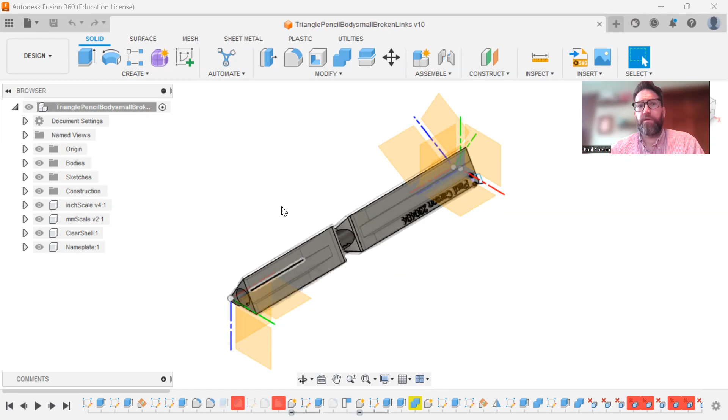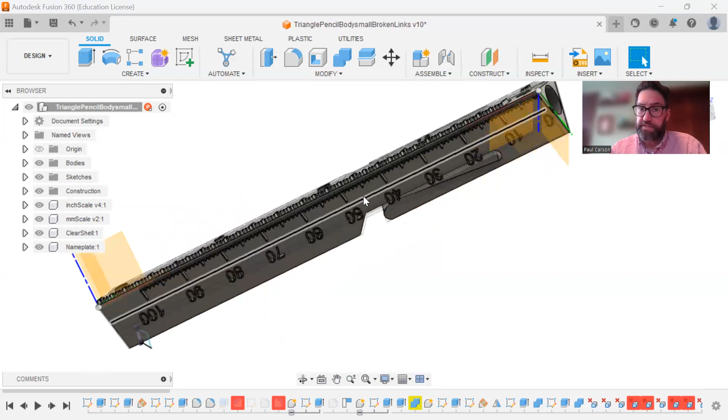And so I like to carry a clipboard and a mechanical pencil, and I often also want a machinist scale. I always liked the look and feel of an architect scale that has a bunch of different scales on a thing with a triangle cross section. So I made this mechanical pencil body that has scales on it. You can see here, and I will post a link to this CAD file. You're welcome to copy it and change it and do whatever you want with it. If you can open the original file, please don't change my original file. Thanks.

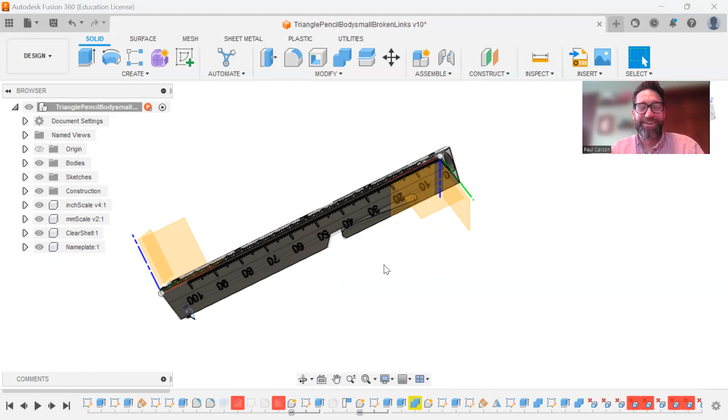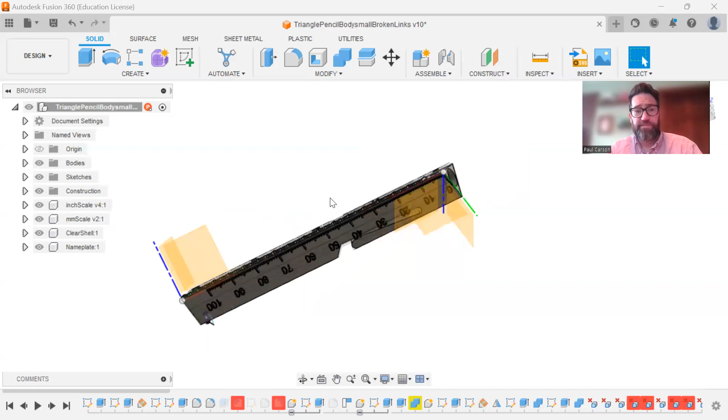Otherwise, it's a pretty good example. This is complicated because I've been iterating on it for a while. I use it to keep the printer running. It is an inkjet printer, and it works a lot better if you run it all the time. So I print a bunch of these and I use them as sort of work party favors. Anyway, so we have this pencil body. It's a tube, it has a clip, it has an inch scale, it has a millimeter scale. They go from opposite sides.

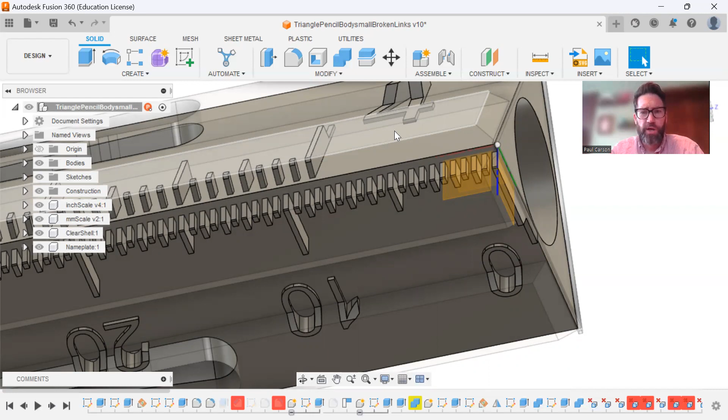The scales are actually bodies in there. You can see them, and there's a transparent body around this. If you open the file, you can check it out, and that's why these shapes look weird. It is because this printer will print in a transparent ink, and you can make a transparent shell around your part. It's super cool. It's more transparent in some orientations than others. You can also wet sand it with super fine sandpaper and get it to be kind of optically clear. There are details around that with UV curing that I read the instructions and then promptly forgot all about. They exist. You can check them out on the Stratasys guides.

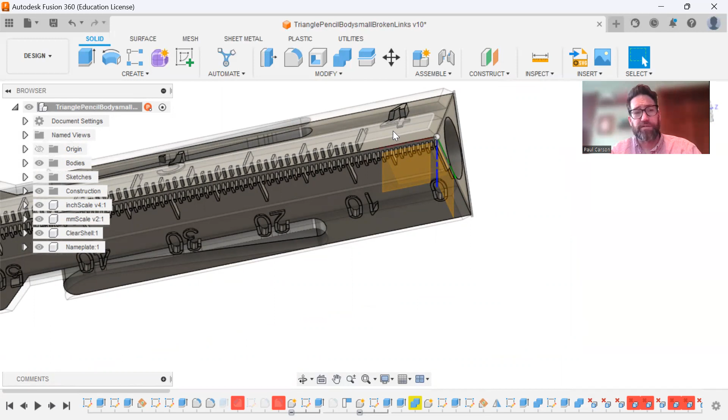Anyway, so this has a body for the pencil. It has bodies for the scales, and then it has bodies for the clear shell. Anyway, that all exists. You're welcome to go through and critique my CAD model and whatever you'd like to do with this, except edit the original. Thank you.

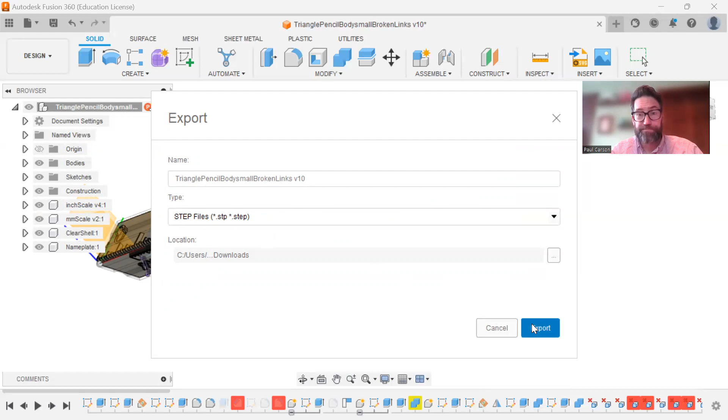And we are going to export this file. So file, export. And we're going to change the type to a STEP file. Not an STL, a STEP file. And this is an exchange format for CAD files. So I'm going to export that. It's going to go into my downloads. And turns out that I've already exported this version, and that's okay. I'm just going to replace it. Cool. So it's exported. It's done.

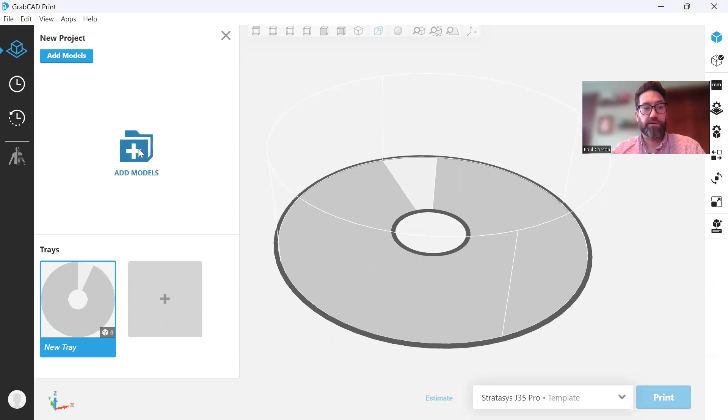Now we're going to move to GrabCAD Print. So I'll open that up. Here we are. We're in GrabCAD Print. And this controls the printer, or makes the files that control the printer. And I'm going to add models to it. So I'll import my models here. You can click this button up here. And here we go. Triangle pencil, a bunch of stuff, V10. It opens it up. It takes a minute because there are a ton of tiny little bodies in this thing. So here we go. We're gonna wait.

I suppose this is when I regale you with a funny personal story. I'm not sure that I have one. All right, it's loading. We're getting there. At this point, you decide that you probably want to watch this video in 2x. I wouldn't blame you. All right, here we go. Takes a while. Bunch of little bits. This is starting to be a lot like college radio. Followed by dead air. And that's the best I can do for a joke today.

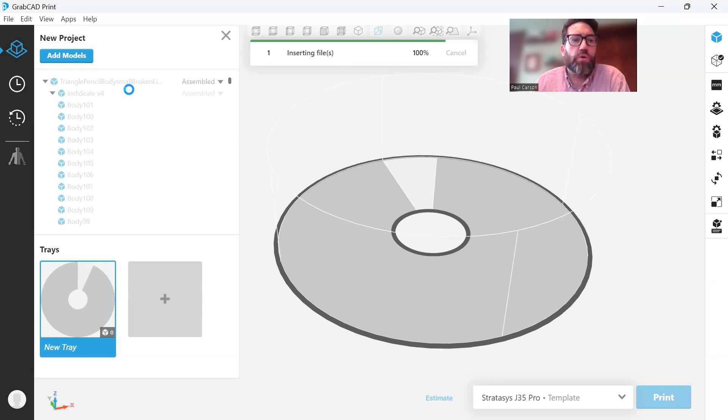So this is all going to open up, and probably because there are a bunch of teeny tiny pieces that all touch each other, there will be self-intersections or some problems with the model, but we're going to get there in a minute. So, here we go. Cool, we got tons of bodies.

Over here on the left, that's showing all of them, at 100%. This area on the right is the preview for the build platform on the printer. It's a ring, so this thing is a turntable, and it has inkjets and an ultraviolet lamp that cures the ink as it prints layer by layer.

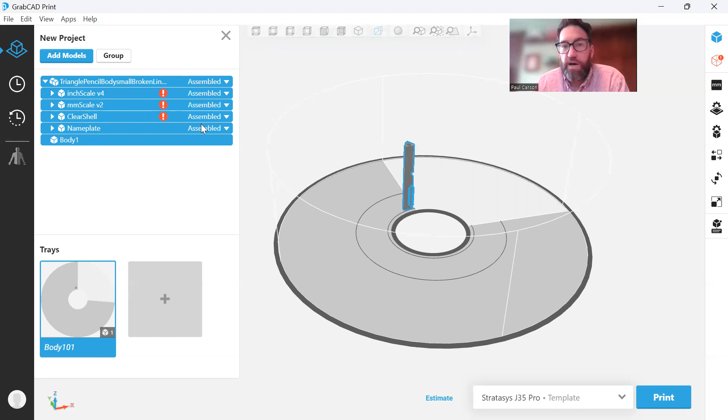So now we have a list of all of our bodies and all of this stuff over here on the left, and a preview here on the right. And if you look at it and highlight it, you can kind of see the outlines of a bunch of this stuff, but it's all the same color.

So I happen to know I want the main body to be white. This thing prints in black, white, and clear ink and a support material. We can get other inks, but we don't have them set up at this time. There's a thermoplastic elastomer, it's grippy, it's rubbery, which could be nice for this application because you grip it. Anyway, it's loaded, so I'll stop digressing.

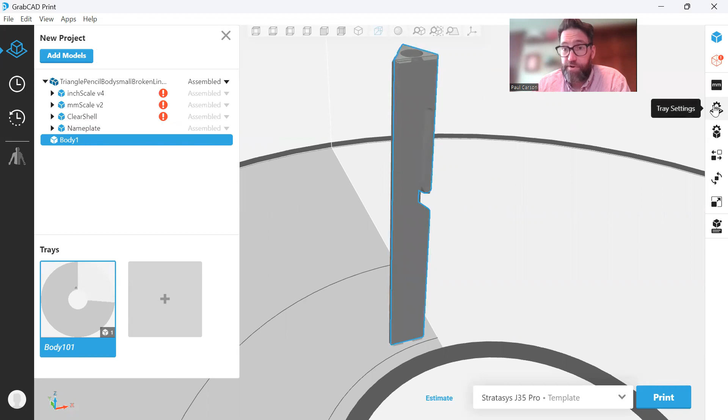So I'm going to load this, highlight this body, and set the model parameters for it. I can change the tray settings, I can change the model info. Before I do that, I need to deal with these errors. It throws up these errors, and you can fix them over here. Five model errors detected, so I'm going to click on this.

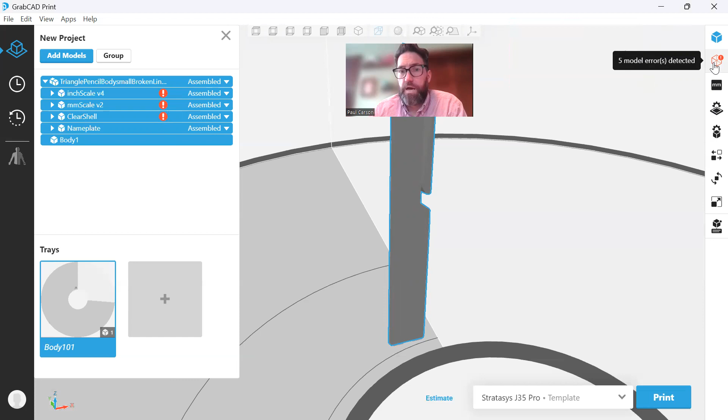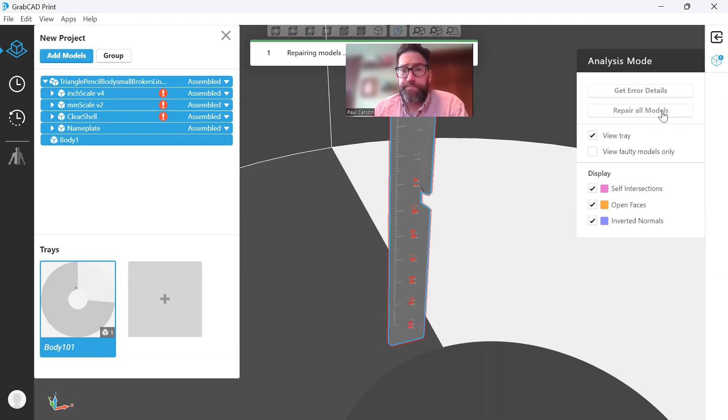So probably intersections, where it shows two pieces in the same place. If you hit repair all models, it just fixes it. Great, so it has repaired them all. Now I'm going to leave this mode, go back. Yep, cool, and it doesn't show any errors, so it's trimmed everything so it doesn't intersect itself. Great.

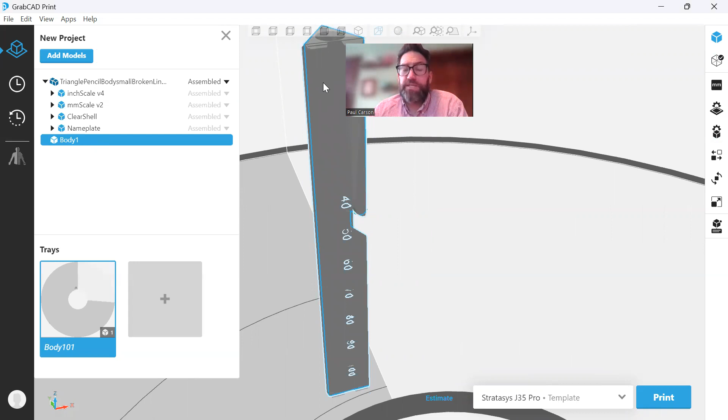Moving right along, I want to change the color of this body. So these will print in black and white. They'll also print in grayscale, so I could make it some percentage grayscale, but I want this to be white.

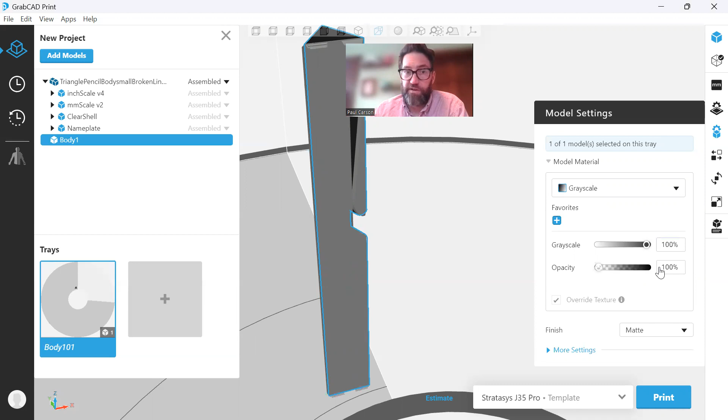So here on this ribbon on the right lets you set up your print and change the things. I'm going to change the model settings for our body. I could change the grayscale, make it 100%, a little slow. I could also change how opaque it is. I could make it all clear, and then it would print in clear ink, but I don't want that. So I want this to be 100% opaque.

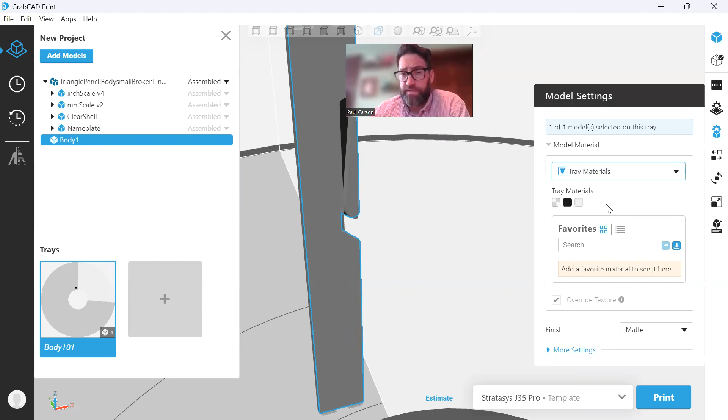I could change these for the different bodies if I wanted. When I designed this, I designed it to use the tray materials. I also, because I use this as a maintenance print for the printer, want to make sure it uses all the materials. So I'm going to highlight this body and pick the tray materials.

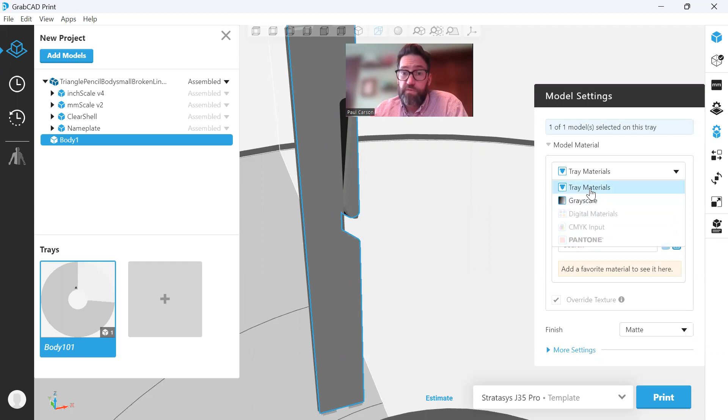So here in the model material, I can choose grayscale or the tray materials. If this were a different model printer, I could choose digital materials or different colors, but this one only prints in black and white. So I'm going to pick tray materials and choose white, Vero Ultra White. It's cool that it gives you the mechanical properties as well. So I'm going to make that white.

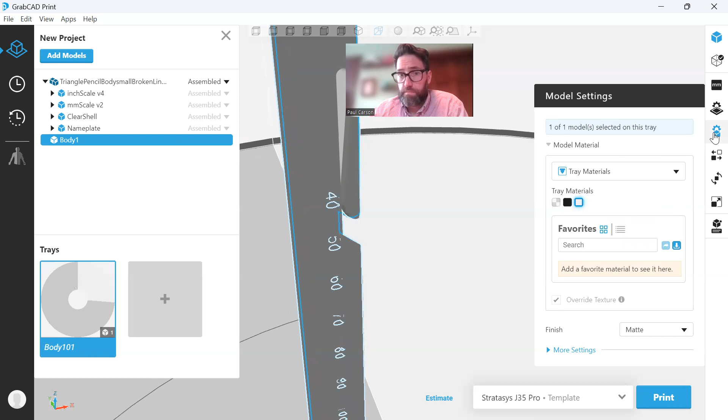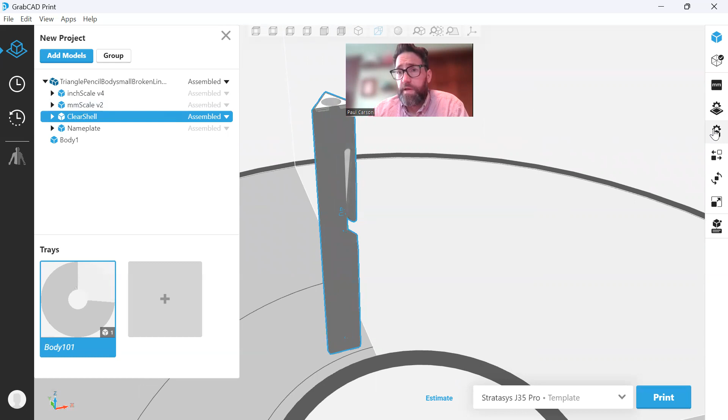And it's not showing up. You can actually only see it on the end because the clear shell on the outside is showing up as the default, which is like 40% grayscale or something. So I'm going to highlight the clear shell and change it. I don't want it to be grayscale, I want to use the tray materials, and I'll use Ultra Clear S because it's clear. Click it. It's taking a minute to update, but there, now it updates to clear.

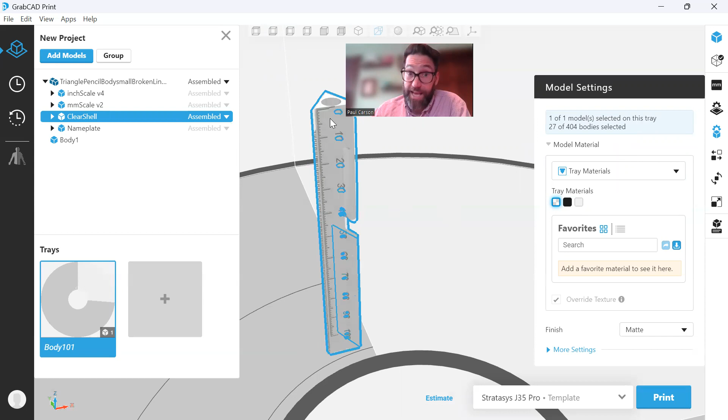And now I have these grayscale scales on my white body with a clear shell. Great. And then I've labeled the different scales and put my name on it because I'm proud of it.

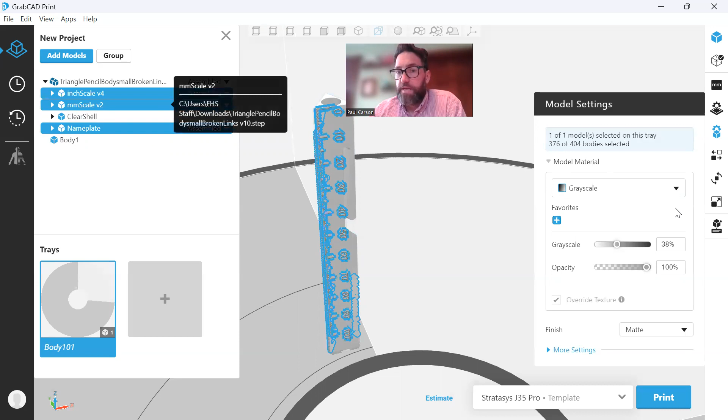The nameplate, if you control-click these, you can select them. These have a ton of bodies because each of these little lines is a body, so I'm not going to expand them. I'm going to make them black because the body is white and I want a lot of contrast.

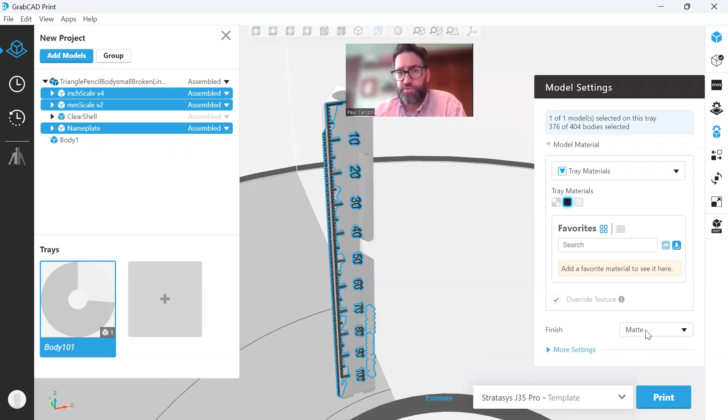Great, cool, they're black. I could change the finish. Looking through the instructions, matte finish will give slightly more dimensional accuracy. I've printed a number of these in glossy, and honestly, I couldn't tell the difference, so I tend to leave this at matte. There are more settings.

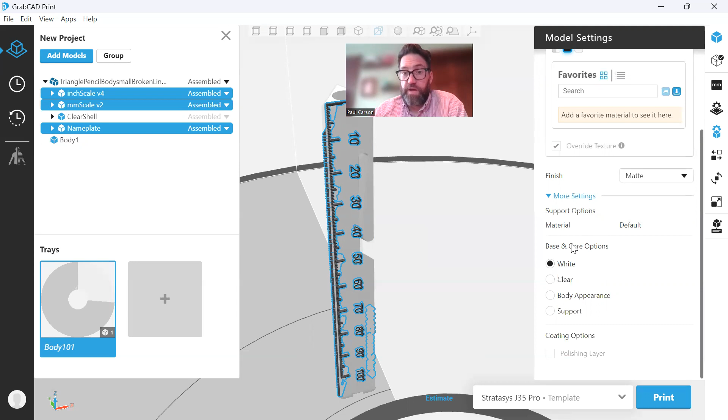I suppose you could choose support if you wanted, but I don't, or base and core - how you do this. Not going to get too worried about it. I'm going to leave those unchecked. Great, so I've set the properties for all of my bodies.

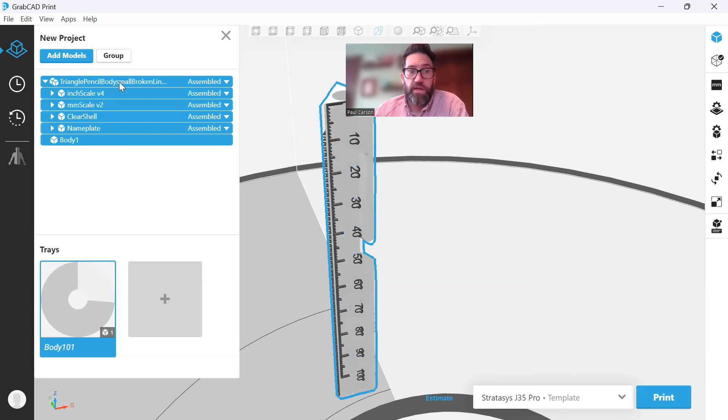I've chosen each one of these and picked their color, and those are all assigned. I'm going to keep the whole thing assembled, and then I want to arrange it on the printer. So the model settings are here. The next one down is arrange - you hit it, you arrange the tray, and it moves your models around to optimize for 3D printing.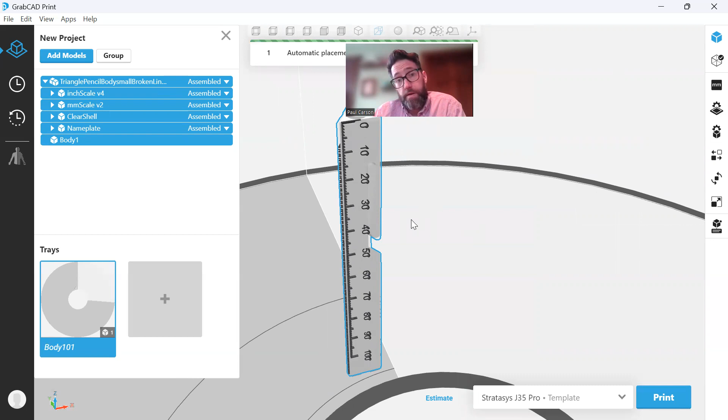And you wait a minute. It's just long enough that I feel like I need to do something to entertain you. You've probably solved that because you said 2x - the last time you had to sit through me waiting for the computer.

Great, so there it is. It's on the print tray. You'll notice that it's very close to the center because it's a turntable and you can get faster print speeds if you keep it close to the center. So it optimizes for that.

You could move it if you wanted. So I can select the whole thing and then I could orient it. I could reset it, I could change the rotations. I don't feel like I need to do that with this model, but play with it - it's not going to hurt anything. You can always reset it or automatically arrange them again.

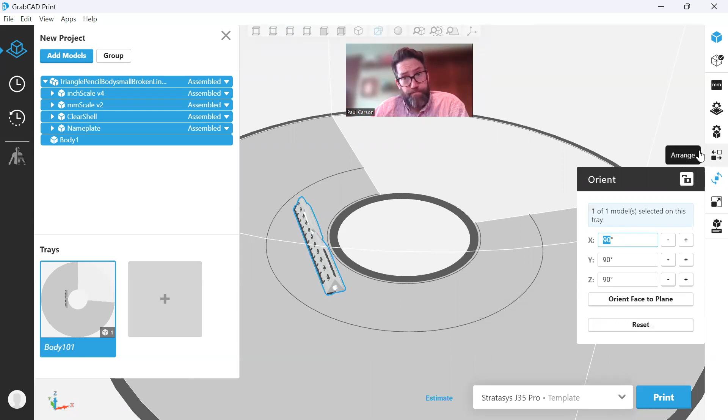What else might I want to do? You might want to duplicate these. So if you right click on them, you can duplicate them. You can mirror them, so you wanted to make a right and left.

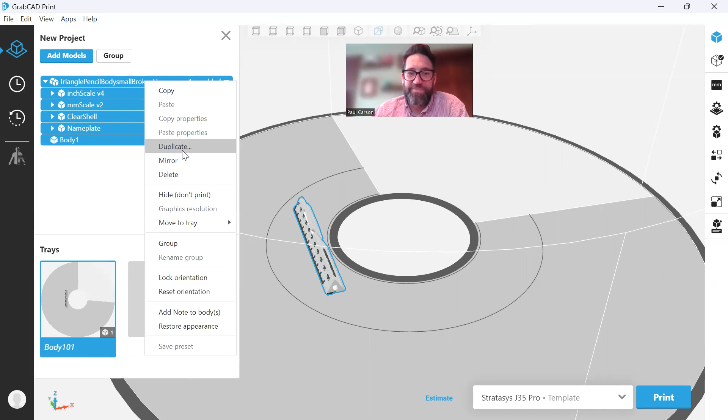I don't know. I'm not sure what a left would look like on this, like the mirrored one. It might make the scales different. I don't know, let's find out. Let it - what happens? I hope it makes all my text backwards. That would be cool.

Here we go. Watching that progress bar.

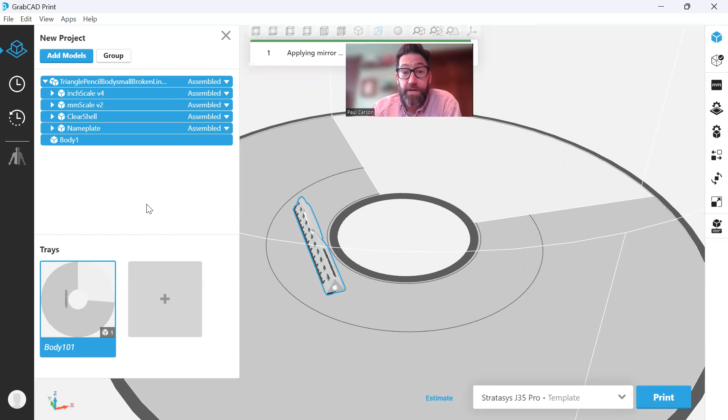We'll do it - what happens? Okay, so I made another one. I'm going to zoom in and see if it's backwards. It in fact is - that's ridiculous.

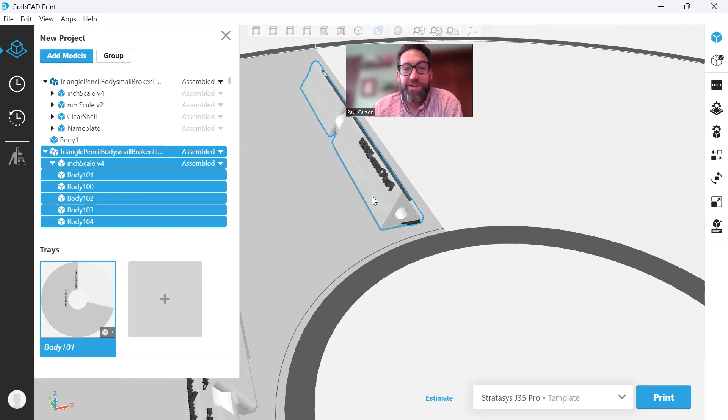And for the sake of this video, I'm not going to make you sit through another progress bar. So I will arrange them. It'll arrange the tray and place them close to the center. There will be one that's backwards.

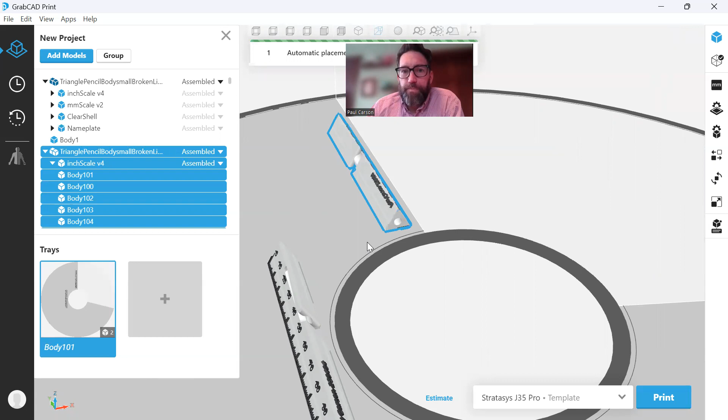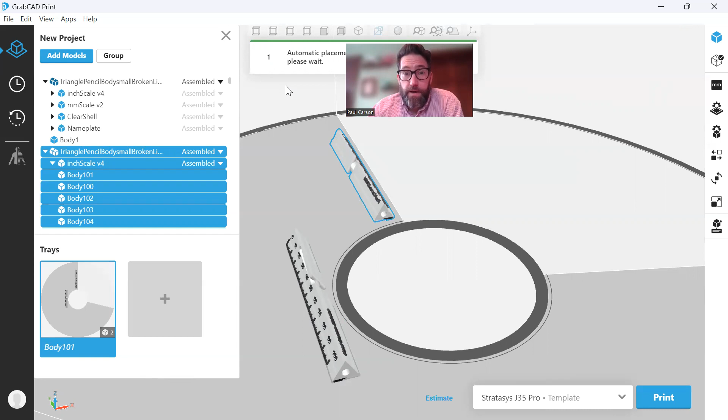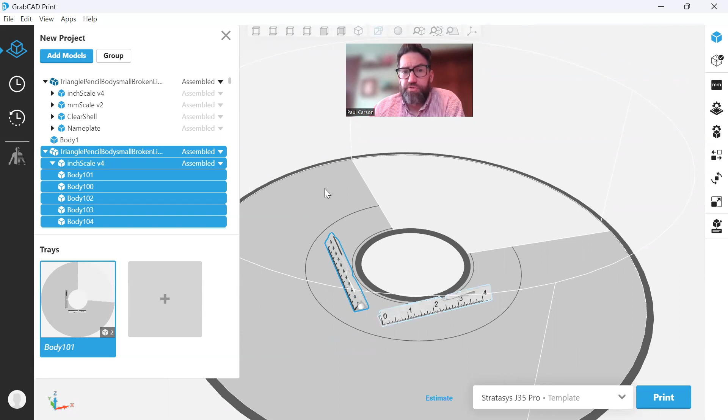It's moving them around. We're waiting. Ooh, we have a progress bar. And it places two of them quite close to the center. So there is a dead space in the table that it won't print on, so you can't have them all the way around. But it's pretty expansive, and you can print parts that are sort of horseshoe shaped that go almost all the way around. It's kind of cool.

Okay, great. So we have our two models. One is backward from the other - doesn't matter. I'm going to highlight them all. Actually, I don't think you even need to highlight them all. And to print this, so you would think that you could hit print.

If our printer was connected to the internet, you could. However, we don't have this printer networked, so you need to save this file to a flash drive that you then walk to the printer and select from. We do that for a number of reasons, mostly so people aren't submitting prints to the printer without ever coming to the lab.

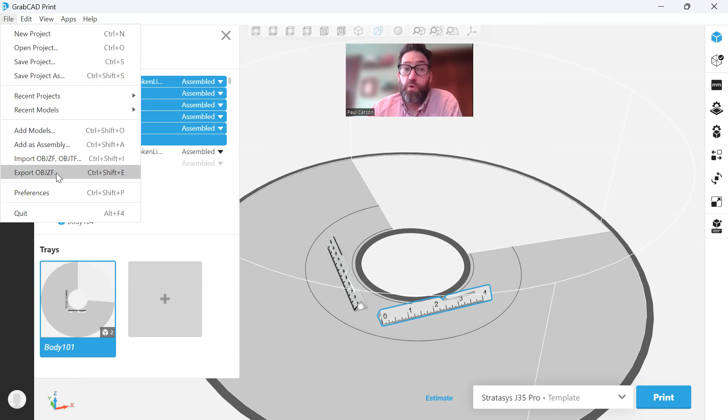So to put it on a flash drive, you go to File, Export OBJZF, or Control-Shift-E. You export OBJZF, and you can put this in your downloads. I'm going to put it in a flash drive so that I can do this, and then I'm going to name this example print. You hit save, puts it on the flash drive - another progress bar.

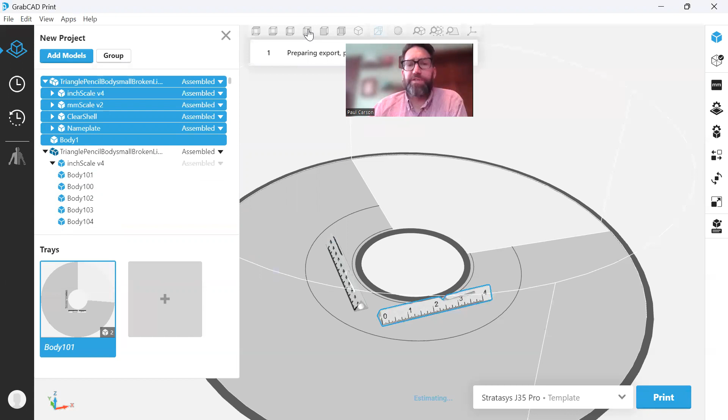You take your flash drive out, you walk over to the printer and start the job, and there are prompts for that. There's also a QR code on the printer that points you to a website with directions with a lot fewer pauses and ums and ers because it's in text with photos. Anyway, there it is, it does the export.

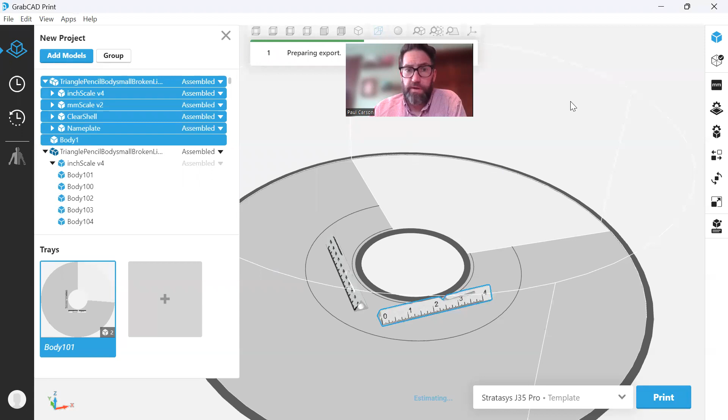Experiment with different sorts of models that you may want to print with this. This is the most interesting one I have come up with - I'm sure that you can think of something better. Thank you very much for your time, and happy printing.